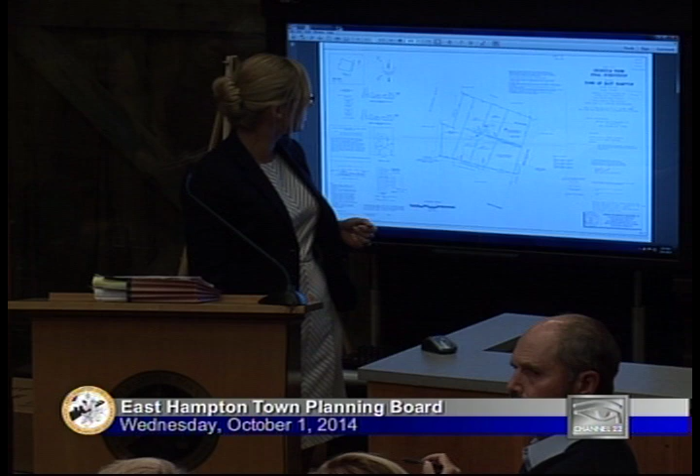I have a question. Where exactly is the tennis court to be? Is it going to be on the west side or the south side? The ag reserve. I know, but it could be north too, there's a difference because there is a neighbor to the south or the west.

I mean, this is the only boundary line that we're asking you to vary. No, I know, but the tennis court would have to comply, I'm just curious where it would be if we're going to okay a smaller setback. If it's in the southwest corner, is there a residential property on the other side? It would have to be 50 feet from that on 3 sides where it's bordering other residential lots. So it would have to meet this setback.

We're only asking that this setback be varied, the setback from the ag reserve. So it would be 10 feet and then 50 feet elsewhere. 10 and 50, exactly.

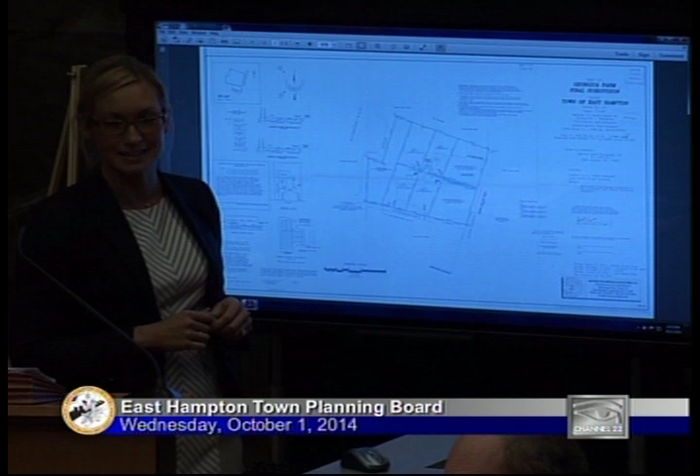Go ahead, follow up? Just- Yeah, Joe, right? But I'm not clear what the reason is why the applicant wants this.

Well, in order to design the property the way they would like, they would either have to have this granted by you, or they would have to go to the zoning board for a variance, which is a possibility, but they're not often granted those setbacks. Since it's very unlikely that an agricultural reserve would be bothered by the noise of a tennis court, the board has granted this type of relief in the past, so that is why we're asking for it.

All right, I'll comment. Thank you, Ms. Cooley. Is there anyone else that would like to comment on the memo? This is Bob Schaefer's application. He's not here this evening, so Nancy Keeshan is kind enough to take the lead on it.

Thanks, Reed. That was my main concern as to where exactly the tennis court is—it's hard to agree to something where I really don't know what I'm approving. I have no problem with the 10 feet if it's on the east side, because it's all within its own space, it's not going to irritate anybody. That would be fine, but I'd be reluctant to approve it if it were on the west side.

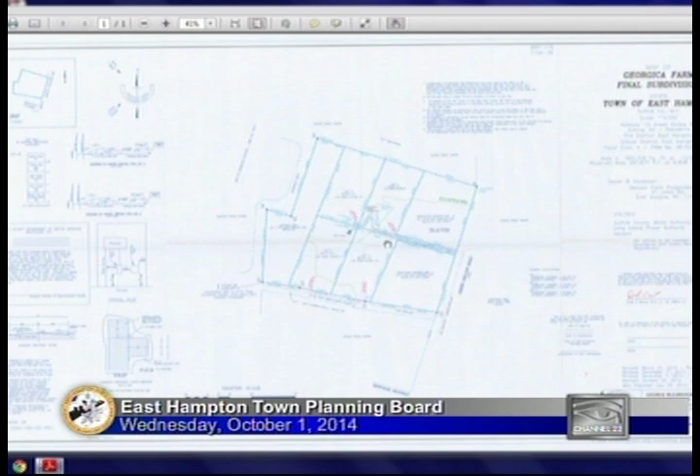Okay, and I think that's a good point, absolutely. I think a covenant would certainly satisfy me. Again, I think the 10 feet from someone using the ag reserve would be no big deal, but when these properties change hands, somebody might not realize that was a relaxation of a setback, and then could have a problem that something so close to them is bothering them, when really they got the benefit of that 20 feet.

Use some of the language in the code, like the right-to-farm part, about warning people about dust and chemicals and the normal things that go along with agriculture. Well, certainly if the applicant's willing to do that and our attorney can make it all kosher, I would be all for it. I think that's fair—we could do that, sure.

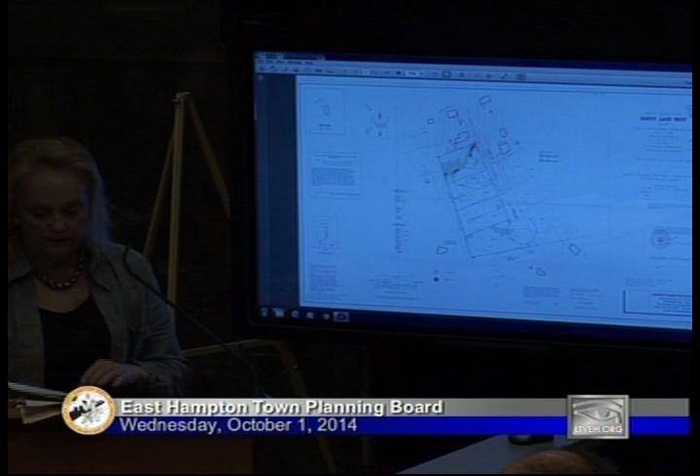The map was revised to provide 2-foot topographic contours, and it shows extensive areas of 15 to 20% slopes in green and 20% and greater in red on Lot 1. Lot 4 turned out not to have as significant topography.

The applicant's letter states that the areas of 20% slopes are not natural and are the result of earthwork done in the past, particularly with regard to the road that they cite, an old driveway that was put in. The planning department notes that at least one of these areas shown of 20% slopes connects to areas off the property and doesn't appear to necessarily represent regrading of the site.

There are a number of provisions of the town code that require that the planning board consider relatively flat terrain, both at home sites and along access drives, requiring a minimum of fill, and that significant topographic features shall not be destroyed.

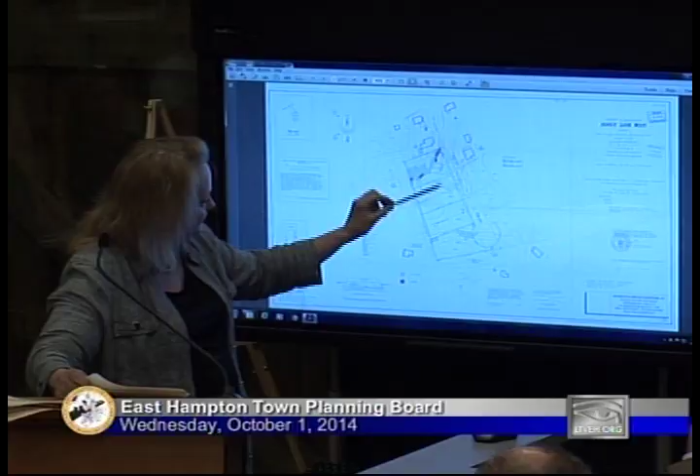So the planning department offers several potential mitigation factors for consideration. The first is, if you increase the lot width of Lot 1 and maybe adjust the lot lines a little bit, you might be able to pick up another 15 feet of flat area, which would give you a little bit more flat area on Lot 1 that could go within a building envelope that wouldn't need grading.

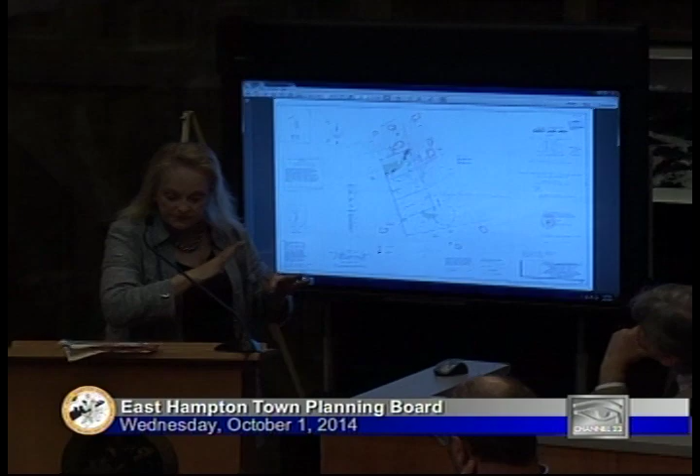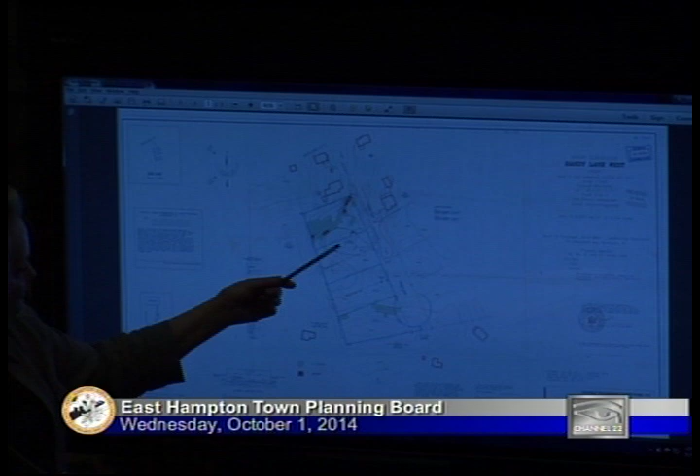Each of the lots exceeds the minimum lot area, so a slight reduction in lot area wouldn't appear to affect the ability to have lots that meet zoning. You could require a building envelope that excludes the rear portion of Lot 1, where the steepest topography is. You could limit clearing and grading to a designated building envelope, with no clearing or grading outside of that. Additionally, you could require installation of project limiting fencing and straw bales between Lot 1 and Lot 2, so that when there is clearing and grading, there's not a lot of erosion onto the adjoining lot.

Finally, we did receive a letter from the fire marshal stating that the project is next to a public water supply, and that's sufficient for firefighting purposes.

So in conclusion, discussion regarding the clearing calculations and the topographic contours, and whether there's any mitigation that should be incorporated in the project on Lot 1, are outstanding. Thank you, Ms. Pahwul.

Is there anyone here that would like to comment on this memo? I do have some questions for you, Mr. Weaver, in reference to the town engineer's memo. I'm sure you've seen this. I've discussed it with him, so I'll go to that. Okay, yeah, Dave Weaver, representing the applicant.

The only areas that the town code says should be excluded from the building envelopes are areas in excess of 20% slopes. These areas up here and this one down here were both created by construction of the house. The driveway that Joanne is referring to - I pointed it out, it was actually overlooked by me even my first time looking at the site because there is vegetation growing in it. It was cleared when the house was constructed, and it actually created these 20% slopes along that part. This little 20% slope here was where there was some cutting done to level out the lawn. The bottom line is all of the 20% slopes within the building envelopes were man-made, could be easily eliminated, and we feel should not be removed from the building envelopes.

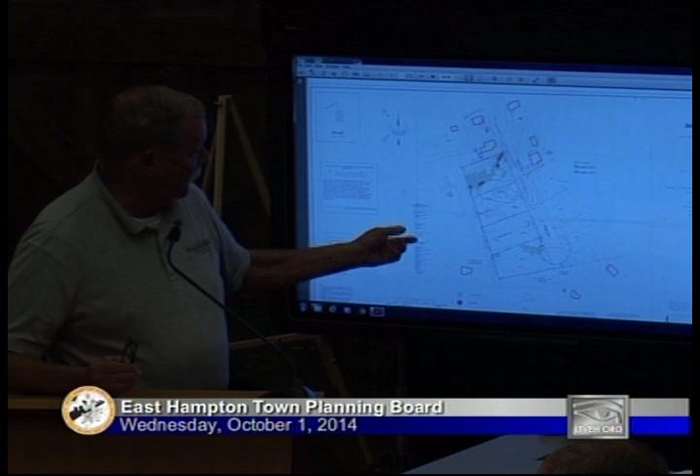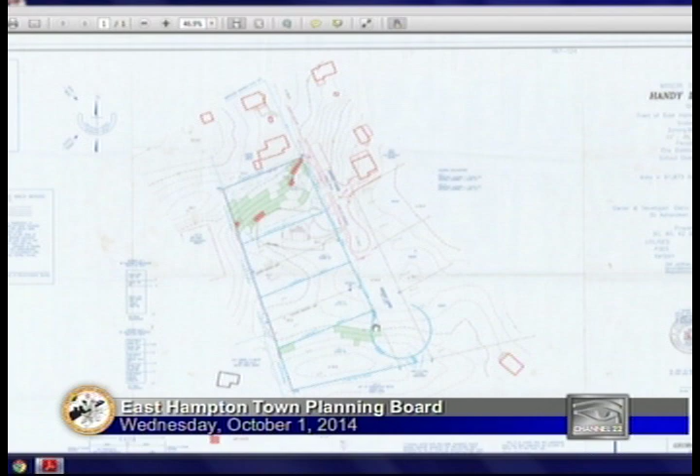As far as the driveway, the town engineer asked that the road be moved further up the hill, and we agree. The applicant owns the land on both sides of the street, so he has no problem with that, and we will move, in the next presentation to you, the cul-de-sac up into the flat area. He wants it all the way up here where the old cul-de-sac was. We disagree, and would rather have it down in the level area, but a little bit longer so we don't have to create flag lots. I told you before, I'm opposed to flag lots in half-acre subdivisions, and we still are - we'd rather not have any flag lots and have all of our lots have direct access onto the cul-de-sac.

Have any further questions? As far as silt bales between lots 1 and 2, that's a typical condition of yours, required in almost any subdivision we've done lately, so I would expect that to be a condition of approval anyway. Fencing and silt bales, we have no problem with that. It's basically been required in every subdivision we do lately - one of your standard boilerplate conditions of subdivision approval. So we're not opposed to that at all.

Thank you. Is there anything else? Okay, anyone else? Then I'll go right to Diana Weir. Hi, thank you, Dave. You cleared up some of the questions I was going to ask.

I also agree about the driveway and taking access on half-acre lots. Usually flag lots in a half-acre zone make long, narrow driveways, and the fire departments can't get in, so I agree this is a much better layout with the circle down at the end. And I have no problem with those 20-foot things that were created, because I understand how that happens. I haven't really gone to look at the property in person, but I have a pretty good view here.

So I'm comfortable with what's been presented so far. I don't think the lots have to be made smaller. But I would like to see the building envelopes on that so we can get an idea of where it's going to be for us, to see where the houses are going to be laid out. I understand there's public water, so you can be closer to lot number 2, that second lot, because you don't have to worry about the separation, but I would like to see the building envelopes for the planning board to be able to see clearly where they're going to be.

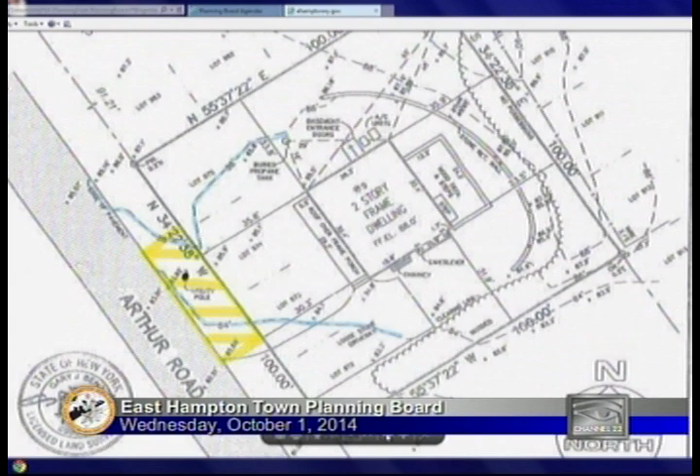Based on the topography that's submitted, this really is the area of the steepest slopes here. So it's actually not the northern 50 feet, it's about 25 feet in to about 65 feet in. So I do think that, provided counsel agrees, the board could have a legitimate reason to say that based on an actual topographic survey of the property, that rise is located more towards the center of the property.

I wouldn't recommend that you remove that condition outright, because I do think it's clearly demonstrated that rise still exists. The question is what is the proper location of that rise. So with that, I'll leave it to the board.

Oh man, I went to the site this afternoon, I didn't get it. Lori Wiltshire for Land Planning Services. My clients contacted me about this request because it came up in their title report when they purchased the property.

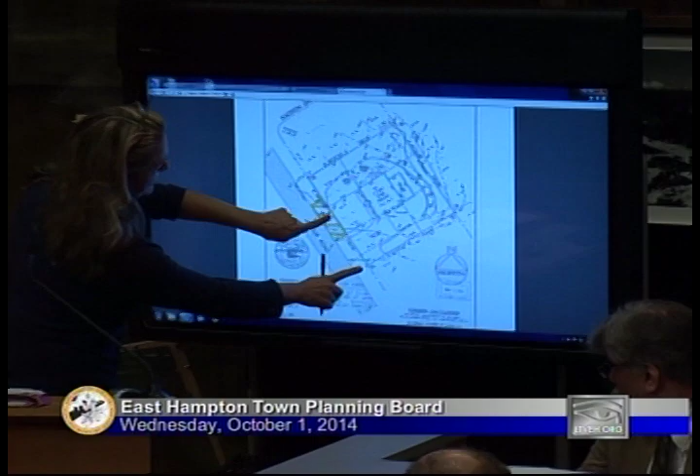It was a very strange thing to find in a title report, and it's actually a strange condition for a planning board to impose on a single-family residential neighborhood like this. It's in the covenants and restrictions. That's how it ended up in the title report, because it was a required condition of the planning board in 1986 that this 50 feet not have a driveway because of the supposed slopes, which are actually here, and that they would have to take access over here, which they have done.

However, my clients have two issues. One is that this bump created by road construction originally is causing runoff towards the house and flooding in the basement. Two, they'd like to move the front door over here and come in over here, so it was causing a problem from both angles. We were hoping to completely eliminate the condition of approval and modify the covenants and restrictions so they can basically use their residential property as most people use their residential property.

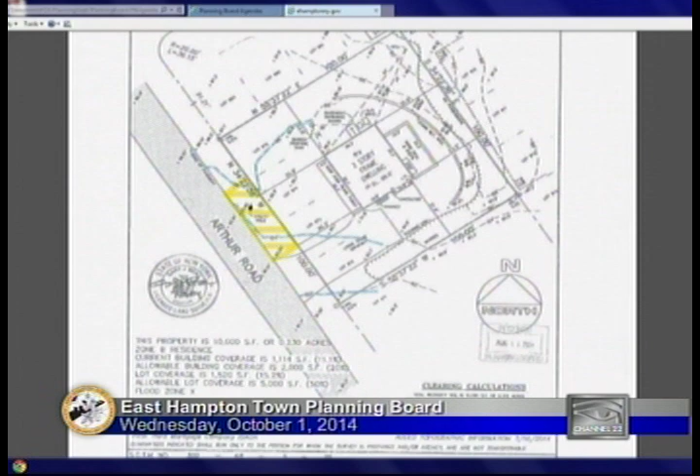Very strange condition, and the circumstances did change with the topography map, and there's no 20% slopes on this lot anywhere. So I would personally like to eliminate the condition and allow us to modify the covenants.

Thank you, Lori. Thank you. I have to say, it's very honest of your applicant to go through this process. Really, man, oh man, I would have gotten a bulldozer and flattened that out, and there you go. I mean, really, it's like...

So at this time, I'll go right to Nancy Keeshan. Thank you. Well, it's Hither Hills, but there's more hither there than hills. I walked by that 5,000 times as a kid, and I really don't know what they were basing their decision on, placing that odd covenant.

And I think there's definitely a change, because we have a new topographical map with good information. So I'd be willing to remove it and support what you want to do. Job Potter? Yeah, I'm fine with it. Pat Schutte? Yeah, I as well.

I went to the site and I just didn't understand this at all, and I was very confused. Yeah, very confused, me too. I needed to have this explained to me tonight, like what the heck. We've had driveways where there's a 15-foot cliff and you don't want to cut in there, and so I didn't get it.

So yes, if anyone's listening from the 1986 planning board, I'm sorry, but I'm comfortable with this change and revision. Me too, I would have bulldozed it down a long time ago. So I agree, no problem.

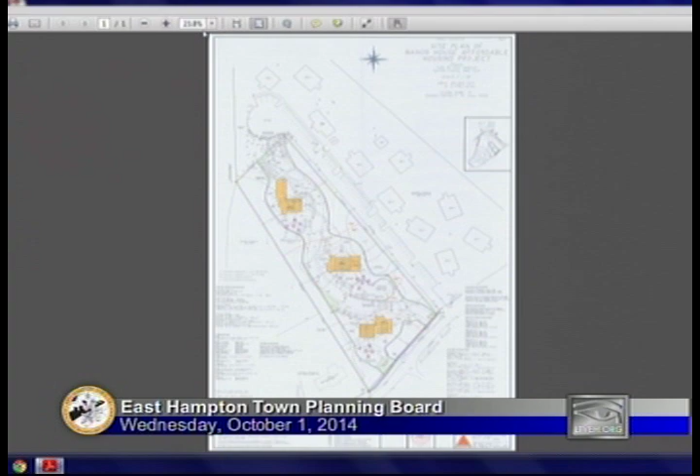Part 4D talks about screening and maintaining open space. We note that although they've illustrated areas of revegetation along the corners, there's some up here, and this rough dotted line is the clearing line where they'll leave everything in its natural state. So they've buffered it along the sides, but there's nothing given for landscaping in the immediate area of the units themselves.

The applicants also, with the narrative submitted after this memo, did submit information about plants and bushes they propose to plant around those units. Ultimately, we would like to see a sketch that shows where those are going to be, but the plants themselves are acceptable.

So they are proposing to use the town's affordable housing credit program. They'll need 4 credits. They recently went in front of the town board for a public hearing to request those credits. You had actually reviewed this 7 years ago or so—obviously not every one of the individual members here—but it was in front of the planning board, and the planning board voted to support the project and sent a recommendation letter to the town board. So those credits are pending.

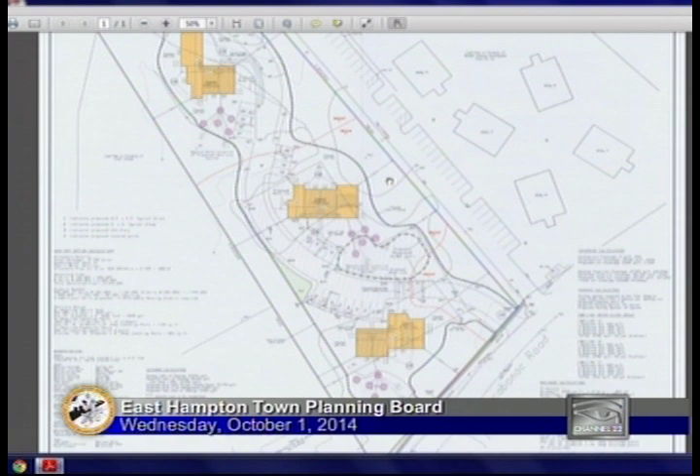With regard to traffic, this is a 12-unit site. On almost every other affordable housing complex you've reviewed, you've required a traffic study. However, most of them are of a larger scale—St. Michael's was 40 units. This is 12 units throughout these buildings here, so I don't know that the scale warrants that. However, that is a discussion you can have as to whether or not you feel that's needed.

There are no comments yet from the Office of Fire Prevention. I know that the chief fire marshal and a member of the East Hampton Fire Department discussed this yesterday, I believe. However, you have yet, as of today, to receive written comments about it.

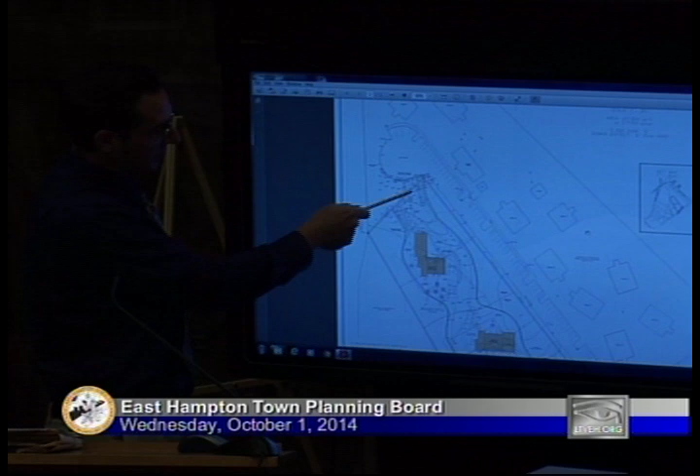One thing that bears pointing out is the fact that the applicants are proposing access for emergency vehicles through Windmill 1 by the cul-de-sac on that property, and there's a gate here that will open for emergency vehicles. So that, I think, is going to be a point of interest for the fire marshal and the fire department. But again, they haven't given you any specific comments on that.

And that's the only access point that's gated, correct? That's the only gated one, yeah. The other access point is at Accabonac Road.

The applicants have applied to the ARB. They submitted a comprehensive site lighting plan, which we find okay. In particular, they're commended for adding photo sensor overrides to the lights in front of the individual units so that the individual units can't leave their lights on all day.

As I said, with landscaping, we need more info. We're not recommending an archaeological report because it's not in the circle and squares map given out by the state.

The town engineer—I actually don't know if he had comments, because I don't have them attached to my memo. I don't know if you received those. Okay, so I guess comments from him are pending.

So in conclusion, it appears that the application is incomplete. Basically, you should focus on three things: whether or not more information is needed in a narrative, whether or not a traffic study should be required, and if additional information regarding the landscaping needs to be submitted.

I would add that I had anticipated the chief fire marshal would have comments for you for this meeting. It should get fire review before it is deemed complete. So I would say those are the four issues that need to be resolved before this could be deemed complete.

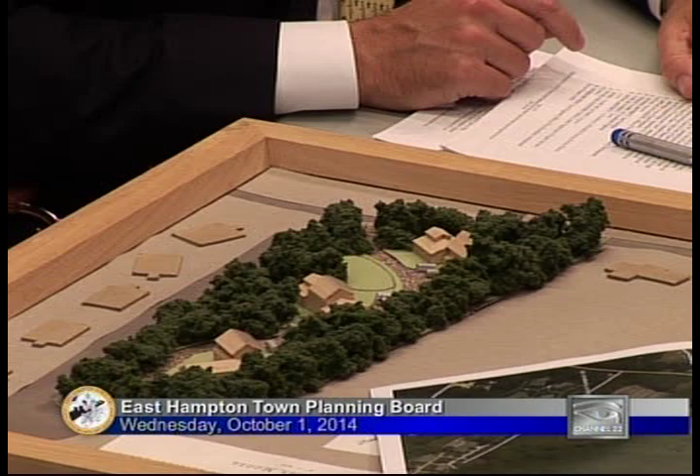Wow, that's so cool. We could almost put that on the table here. Move your stuff, right here. Do one here, and then we'll look at them for a couple minutes and swap. This is very Accabonac, right, cool. The access gate here. My stuff, wow, look at this one. Another one, boy. Move my stuff. Right here, come on, come on. Bring it up, that's close, good. Up close and personal, it's beautiful. Here we go.

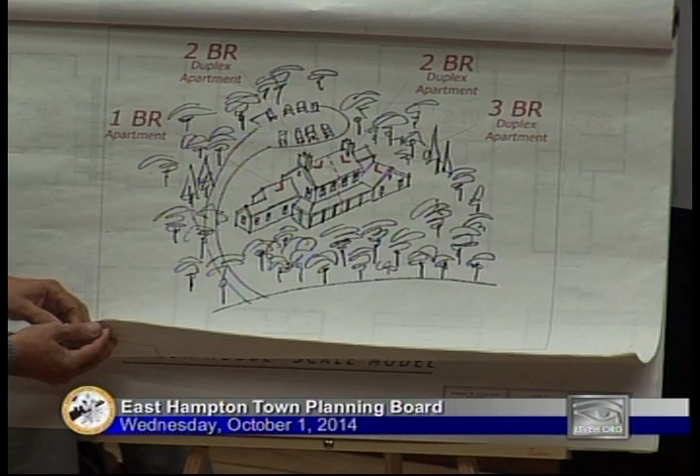Then we started to look at what would be the best floor plans to have. We worked together as a committee and developed these floor plans here that are very typical. So we have a two-bedroom duplex, a three-bedroom that could be either one-story or two-story, and a small one-bedroom.

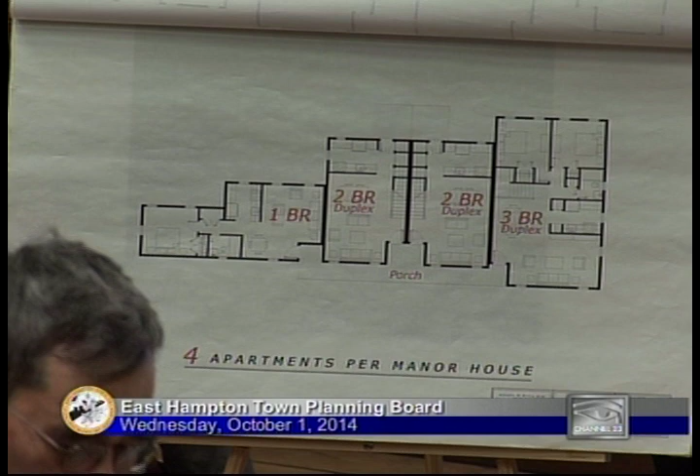Then we decided that in a typical building, we could put these together, just like that. And that's what that model there represents. So these are two-bedroom, two-story units, this is a three-bedroom unit, this is a one-bedroom unit. But they can be assembled in many different combinations.

What we started to do is reverse them, and then put them into combinations, and we came up with 40 different combinations. As you can see, the configuration will fit practically any lot that would be available. These are some of the typical units. Here we just picked six of them, and how they could look as farmhouses. Again, that model is pretty representative of what we had in mind.

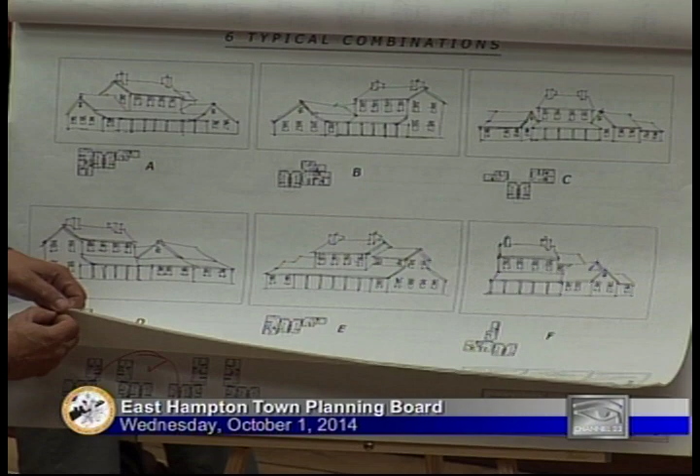And then, the elevations here, when this lot became available, the tennis courts, we took a look at it, and we decided that this one and that one would fit and be appropriate for this lot. And so here they are, 1, 2, 3.

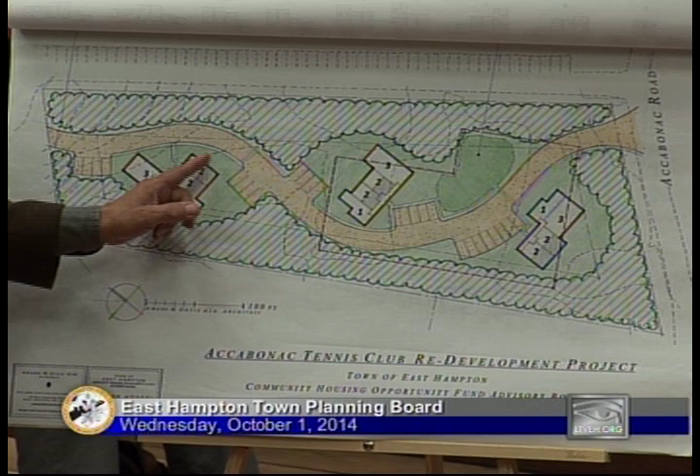We decided to orient them so that this facade, the roof, is facing due south, so they can get solar panels. We decided that the road would sort of meander through the lot. There's a playground over here. There's also access for fire equipment. If we come through here, through the gate, come around here, so it would be able to turn and serve the complex. This is an overhead view.

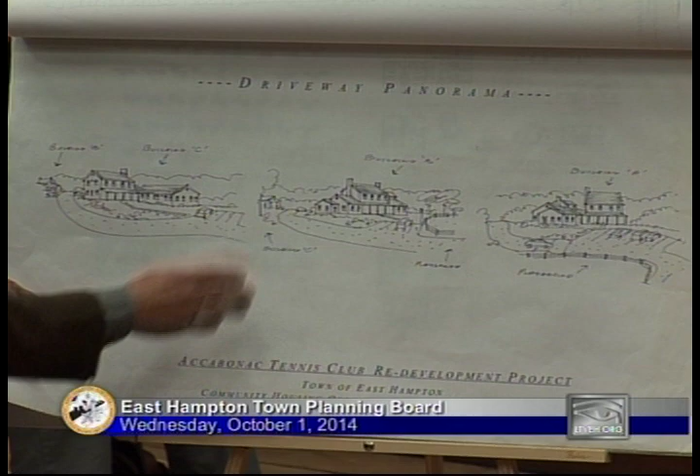And this is a panorama, kind of a combined panorama of what the building would look like as we drive through. As you can see, they would all appear as farmhouse buildings. If you take the model and just sort of look at it from this perspective, that's pretty much what you'll see as you approach the road.

Each one's different, right? Nice. And the Velcro represents solar panels. These are the individual buildings that were selected, and this is what we have now.

Can I ask a question real quick, sir? There was one concern I had. I think this is great, by the way, but one concern I did have was in reference to emergency service vehicles, and it sounds like you're fine with that because they can filter through and around through the back. A question I would have is, why do you even need a gate in that rear part? That doesn't make much sense to me. Again, it's not just emergency service vehicles, but you have service delivery trucks and things of that nature that might not be able to get through that gated area, correct? I mean, maybe I'm curious about why that would be gated off.

Well, I think, my name is Tom Ruhle, by the way, Director of Housing for the town of East Hampton. And interestingly enough, as Marguerite asked me before, I was on the '86 Planning Board, but I don't remember the application either. Starting to feel old. No, but anyway, it's a good question. We were trying to avoid creating it as a continuous through loop that would develop everyday use, yeah.

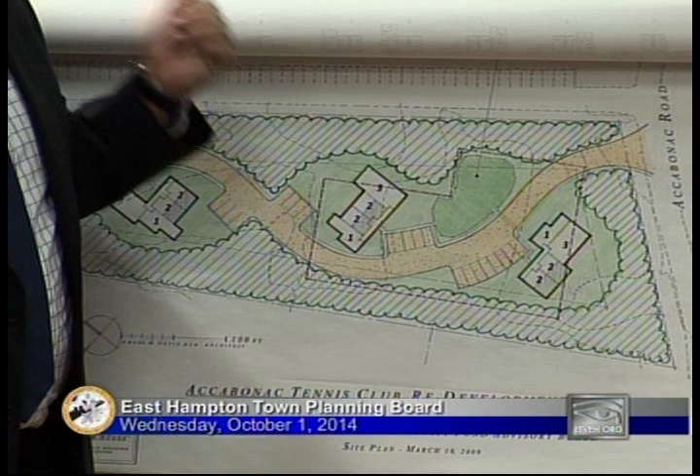Well, I would imagine, but Dave has pointed out, I know he hasn't spoken yet, but I spoke to him and he raises a valid point. My feeling was one of these would be open, you would pull in, back out, and go out. But there is something to be said for making it a through, so that we don't.

Well, I think that creates issues for Windmill. They're not gonna want to have traffic from here coming. No, I'm just wondering, at the end, if not a cul-de-sac, some kind of a T or a Y, some way that a sizable truck can turn around without going through the gate and get back out.

Well, this is kind of one of those situations where typically we will talk to Tom Talmage about coming up with some solution along those lines. Our engineering work was done by the town engineer, so it's kind of like, yes, I think that's something we're gonna revisit. I think the board has a valid point about trying to create some way of being able to make deliveries on the site and leave.

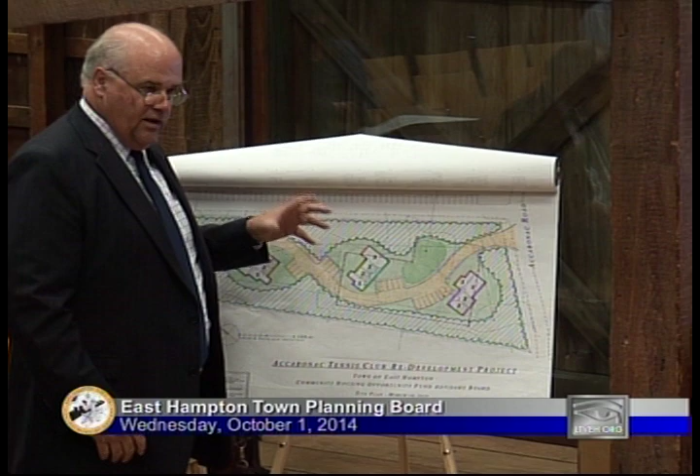Just to give a little bit of background - most people go out of their way to keep me talking less. This originally, the concept, the town has done rental housing and the town has done home ownership. This is a hybrid, the ability to take someone who may not be able to afford a house, but has a little bit more income than a renter, and buy a condo unit. So it's the first time we've proposed this.

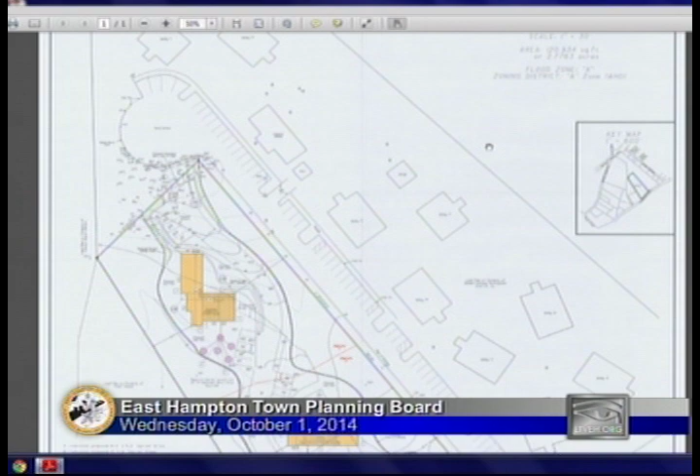Just to explain, we're hoping - as John and I found out, because we both went to Albany to try to convince the state of New York to change the law - the condo units the buyers will have to own the land underneath it. We were originally proposing it on leased land, which apparently is illegal in New York State. If you have a land trust, you could have done it. Yeah, there's four places it's been done. I got the New York State Senate to pass a change to state law, but there's one on Shelter Island. You could have done a land trust, but that would be another animal.

As I've had it explained to me, you cannot do condominiums on residential leased land. You can do commercial condominiums. It would be a land trust - the land trust allows you to do that, but you would own the fee title of all of it, and they would just own the structure. Well, that's the model we've used at Green Hollow, and that's what we're planning on doing here, until the condominium attorney said you can't.

Well, it can't, because it can't be a condo, since the state condo law doesn't allow it - it would have to be a land trust to do that. But Battery Park City technically is a condo that's been allowed. So I said if they did it for them, they should do it for us, and we almost got that. But anyway, our plan is to own, with a 99-year lease with the homeowners association, everything but the sale of the actual unit with the underlying land, and to protect the property with recapture provisions and provisions so that they stay affordable, for want of a better term, in perpetuity.

Can I ask some questions while we're on this?

Sure, so your structure would be a condominium structure, and you'd have some kind of homeowner association? Correct, with an offering plan? Yes. Just so you know, 12 units is tough for common charges. Depending on what you have, you don't have amenities, so it's not going to be like a pool, but you still are going to have insurance and maintenance of the property.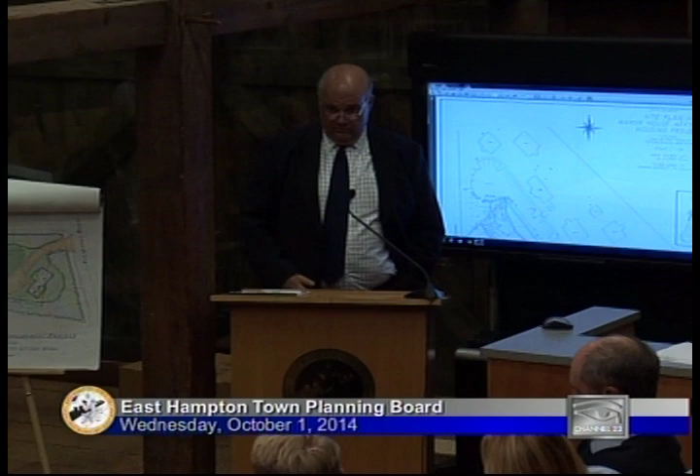Because the housing authority has experience with plowing and mowing. But the offering plan is going to have to be filed, right? Yes, with the Attorney General's office. That's how I found out you can't build condos, was one of the things the attorney that the town will be hiring told me as this gets further through the process. You can't do that. So that's how we evolved into what we're doing. It's an evolutionary process, you learn on the fly.

But that's good, this is a wonderful concept, and I love, ever since you came up with this architectural design, it's been wonderful. For the record, Amato has donated his time, and he is amazing. Donated this design, and the town actually owns the design.

It's been donated, and I have to thank the planning department too, because Joanne Powell originally, who I think may have left, Eric now, Marguerite, of course, being in charge of all of those, the town engineer, and we even got our plant list from the planning department. Because when I found out we didn't have base plantings around here, we went over to planning and said, okay, what would you like us to plant? So it's sort of one of those, a lot of people working together and hopefully going to make it happen.

I know Dave has some other comments, and I know what some of them are, and some of them are pretty good ideas, but I won't speak for Dave. Anyway, does anybody have any other questions?

But you do have a narrative that's going to go into the file. I'm not talking about the narrative before, I put a narrative into the file. I didn't see it yet. Me being me, after Eric wrote the memo, I said, what do you think's missing? And he told me, and so I wrote a response.

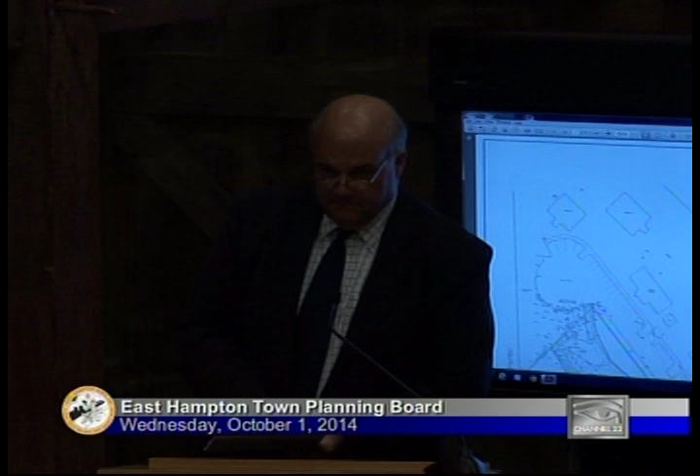Mr. Weaver? Yeah, please. Dave Weaver, first I'm representing East Hampton Ambulance. The fire marshal and fire department were nice enough to call me to their meeting yesterday to see how we felt about this project. The ambulance corps totally supports affordable housing, and we'd hope to get a few members out of this complex. So we totally support affordable housing.

The gate concept, we're not in favor of at all, unless you put in a full-size cul-de-sac. That would be our first choice. Because we're going to get in there with an ambulance, and at 3 o'clock in the morning, we don't want to have to jump out and fumble with the key, have the gate not open, any of that. And then, if all the parking spaces are taken, with someone's life in danger, have to back all the way out of there, and some of our drivers won't make it. I hope I will, I'm the driving instructor. But anyway, so the fence itself, as the project is designed, is totally unacceptable. We know we don't get a vote, but hopefully you'll listen to us.

A cul-de-sac would be acceptable, a full-size cul-de-sac, so we can make it without having to turn around. That would be preferred. If that doesn't fit, an emergency vehicle turnaround would also be accepted. But our first choice would be the elimination of the gate.

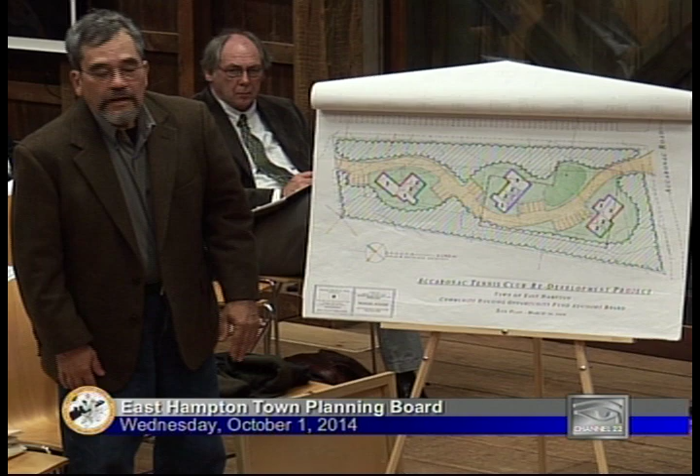Well, there is a small porch in front of each unit. To the back? No, at the front. Right. We actually had considered patios at the beginning. I'm not quite sure how that. It was in the narrative, it never got put back on the actual site plan.

Well, it would be a good consideration, because they might have barbecue or something in their own little space, and sometimes they have fences in between, so you have a little slab, and then you have a little privacy area, so you can do some outside stuff as a family. I've seen it in other complexes. I think it's a consideration for the applicant to think about. Yeah, it's a good suggestion.

Okay, how are you, Ian? Yeah, this is the first time I've seen the project. I understand it's been around for a while. I appreciate the collaborative spirit of everybody involved, including Mr. Weaver and the applicants and Tom.

As far as the cul-de-sac goes, I agree there needs to be some turnaround, not only for emergency vehicles, but for daily deliveries and things like that. I hate redundancy, so if there were a way, I realize you'd have to work it out with Windmill Village, if there were a way to have an unlocked gate where you could share that cul-de-sac, I think that's ideal. However, there may be hurdles involved. If that's not possible, I don't think it's necessary to have a full cul-de-sac there, but a large turnaround and still have that emergency gate that could be used in case of some sort of emergency. But again, if there were a way to leave that gate open and just share that cul-de-sac, I think that's ideal. I hate to create more pavement unnecessarily.

I think it's a generally good project. I know that Diana and Tom certainly know a lot more about affordable housing than I do, and the types of things that are good. So the patio in the back sounds great to me. But again, I think this is the first time I've seen it. You'll discuss it and probably improve upon the plan.

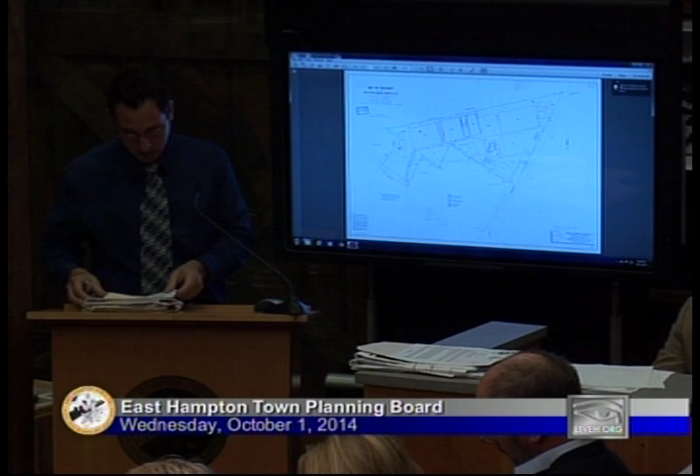Our next site plan review is going to be Hampton Racquet at Green Hollow. This was postponed from a previous meeting. The applicants submitted a narrative, and based on the wording, it sounds like they also run a tennis club and a day camp. For the day camp, we've traditionally had applicants get a semi-public facility special permit for that type of use, so the applicant should submit that, the required fees, and it should be part of this application.

There's an item on here illustrated as a garage, and I went to the site. It appeared that it wasn't being used as a garage, but as some kind of store. The applicants can address that and clarify the use of that building.

Right now the site plan is spread across two documents - they submitted a revegetation plan, and they also have a survey from before, but we don't have one formal site plan based on a survey that illustrates every proposed and existing structure, differentiated, and includes coverage calculations and all the required elements.

So I'll go back to the re-veg plan, since it has more detail. 60-foot setbacks, doubled, are going to be required along most of the property lines here since it borders a residential district. However, the board can relax that doubled setback requirement when it borders non-residential property.

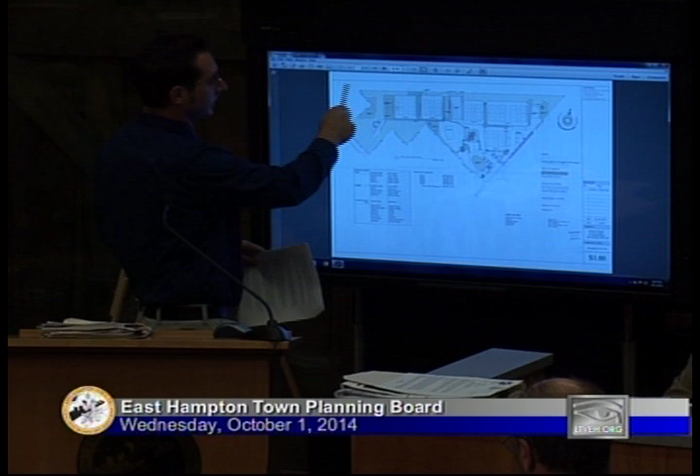For parking, they've illustrated 52 parking spaces throughout the site, which is what's required from the previous site plan approval. They've illustrated 25 of them as grass parking. The planning board can allow up to 50% of parking as grass parking if appropriate based on seasonality - it does seem the day camp use is probably more of a summertime use, and the tennis club, being outdoors, would also be more seasonal.

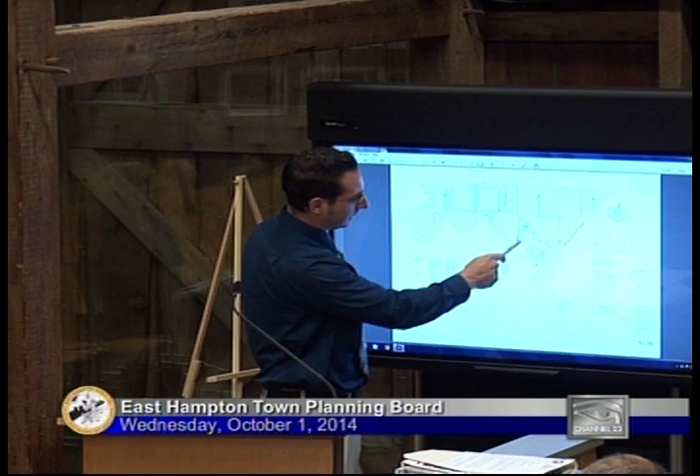So basically, they're proposing a gravel parking lot in the southern area, with an overflow grass parking area to the north. There's also a second access point and 8 parking spaces proposed along this side of the property, coming off of Buckskill Road, and you'll need to determine whether or not that's appropriate.

The applicants can speak to why they feel they need that second access point. It was stated at an earlier meeting that they want emergency services access. This will, at the very least, need to be redesigned a little, since the parking spaces need to meet the 60-foot setback from each of these two property lines. But it does look like they could fit a second access coming in off Buckskill Road.

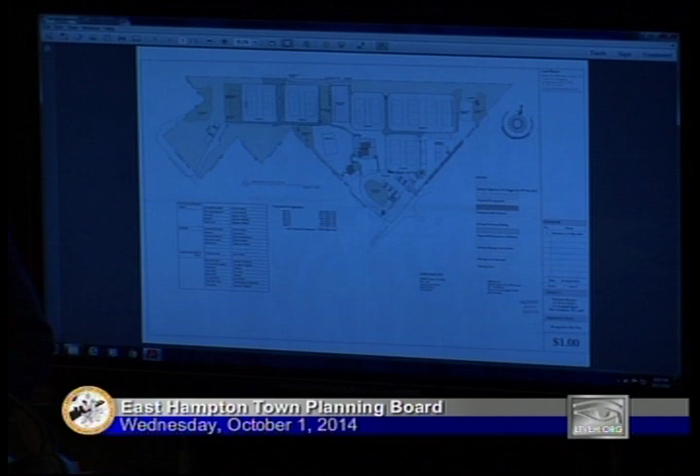They're proposing to remove this tennis court in this area. They could put a parking area either up here or situated a little differently - they could dimensionally fit it within the regulations, but you should discuss with them whether or not that second area is appropriate.

They had added a 13th tennis court, which they couldn't fit on site because of the regulations. This was one right here. They're now proposing to keep that one but remove this westernmost one, which is near a residence. That's acceptable, bringing them down to 12, which is what they're approved for. This one they've converted to a practice court.

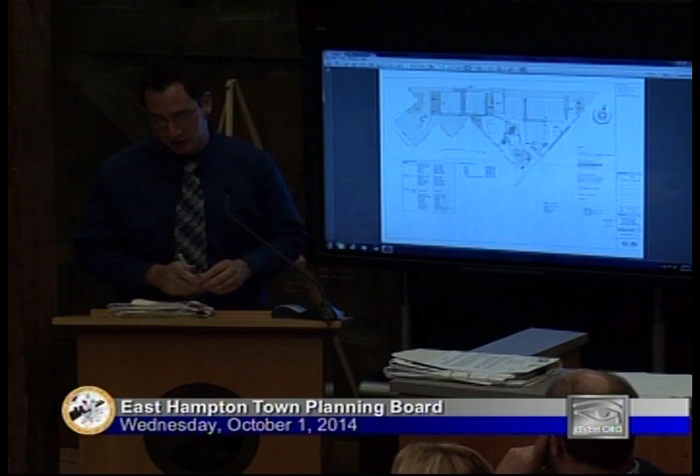You could look at it as though that's not a full tennis court, and that would affect their parking requirement. I don't know, I could see the other side too. If it's a practice court, people would still be using it, and it affects the use of the site. So that's something you might want to contact the chief building inspector about, to determine whether or not that's technically a tennis court, because the parking requirement is based off the number of tennis courts.

So that's one issue. As for the applicant's revegetation plan, myself and Lisa DeAndrea from the planning department met with the applicants and determined what the pre-existing amount of clearing was. The revegetation plan seems to meet the requirements. We find it acceptable.

There's no info on lighting submitted. We had previously recommended, and still do, that a comprehensive site lighting plan be submitted. The property's in the middle of a residential neighborhood. I don't know that they have too many structures here, but if they're going to be lighting the playing courts, that's of course a concern given the close proximity to residential property.

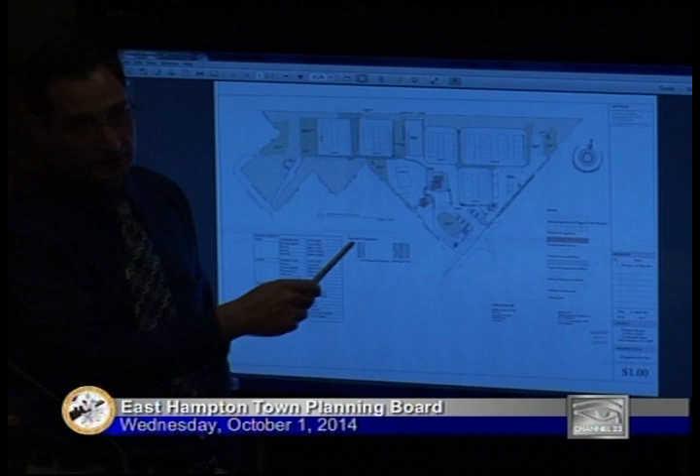With regard to landscaping, no information about landscaping has been submitted. You do have a re-veg plan here. I would think it would be prudent, there's not a whole lot of room here where this parking lot is. You can see this berm and line of trees illustrated on the plan, but it's actually on the neighbor's property. I do think that if there's anything the applicants could fit along that line, landscaping should be added in that area of the site.

Additionally, there's a big area up here where it looks like more screening could be provided. There's a lot going on with this property, and it's right in the middle of a residential neighborhood, so it's prudent to require as much screening and landscaping as possible.

The ARB has no comments. The town engineer has a memo. I won't go through everything individually, but the applicant should address his comments. He has five issues and says he does not find the engineering element satisfactory. With that, it seems the application is incomplete.

Thank you, Mr. Schantz. Let me ask Eric a question. Yeah, please, go ahead. Eric, I'm a little confused, but I guess that would be the western end of the property — they're looking to put a second access in there and parking, clear more?

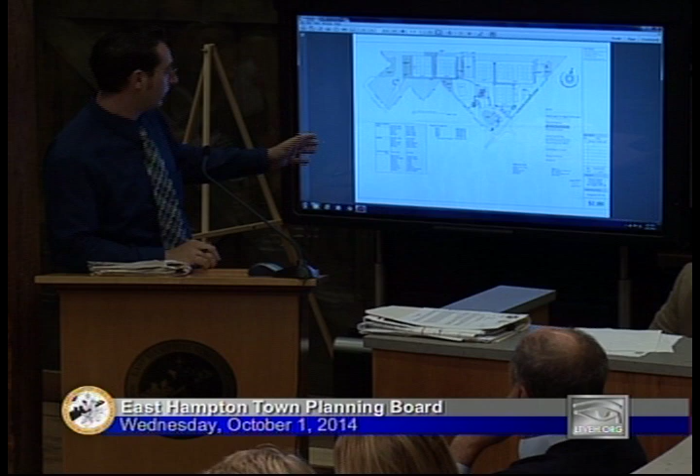Yes. Right now there's like a path that they cleared to there, but this new revegetation plan that they've submitted shows that area and then relocates some parking over in that area. So that's what they're proposing to you right now. Okay, and do we have that? I mean, what are they, just that? This is the only new plan that you have.

Okay, thank you. Is there someone here this evening who'd like to comment on this memo?

Members of the Planning Board, Tiffany Scarlato, 45 Division Street, Sag Harbor, for the applicant. I guess we'll start by addressing the elephant in the room tonight, which is the use issue. We do intend to amend the application for a semi-public use for children's programs, seasonal children's programs, as an accessory use to the tennis club. I would point the board to a May 1998 Zoning Board of Appeals decision, which verifies that this is in fact a legal accessory use for that property.

By way of background, the tennis club is a community-based club whose mission is to provide access for a tennis experience for all, covering both the activities of days gone by and the activities a modern 21st century club must provide. I'd point you again to the 1998 decision — we'll make a written submission to the board including all of this — which also notes that due to the seasonal nature of tennis clubs, and for economic reasons, it's important that area tennis clubs operate children's programs on a seasonal basis. As you know, clubs have had to change over the years and now offer a lot more than just tennis, and that's part of what this applicant has done and wants to see move forward.

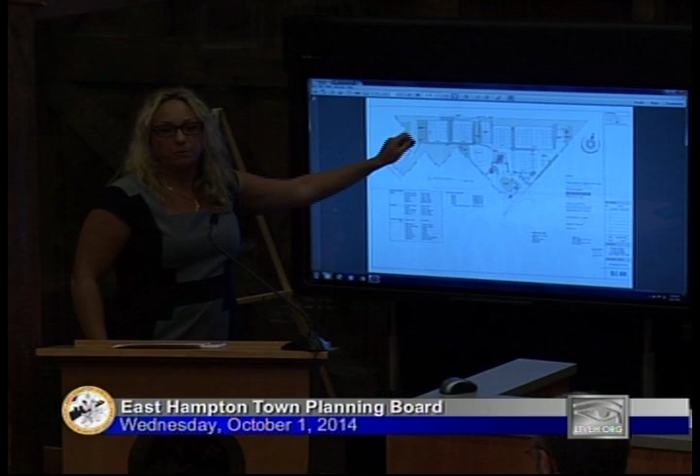In reference to the access point that the neighbors are not happy with, is there a reason it stops right there? Could you somehow extend that out? I'd assume you want that for emergency services vehicles. That was the issue—there was an incident on one of the tennis courts in the back, and they had to try to get emergency access. It's pretty difficult to get an ambulance through this location. So the issue really became having emergency access. I'm not sure I understand the question though.

Well, that parking lot's not in conformance where it is, right? It doesn't meet the setbacks. I think we do have an alternative plan. Britton was going to address a lot of the site plan issues, but we have an alternative plan that does meet the 60-foot setbacks.

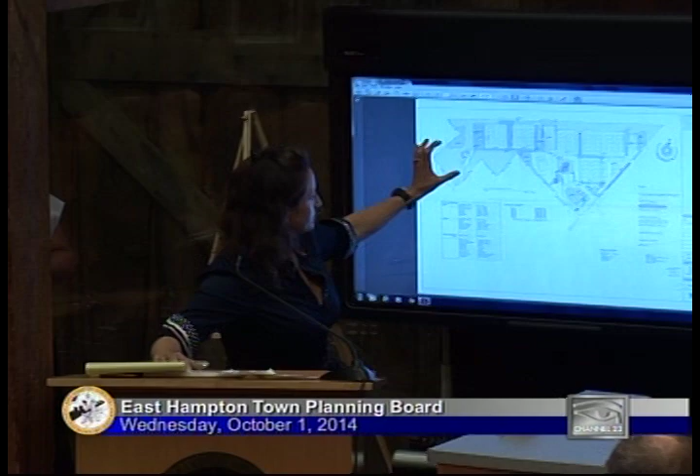Hi, Britton Bistrian, also for the applicant, Hampton Racquet. To address that specific issue, Eric brought up that this parking area needs a 60-foot setback from the two residential property lines. So it's literally a minor shifting—not an issue to meet it. I have a schematic of it, and it's like a 10-degree shift in exactly this same configuration.

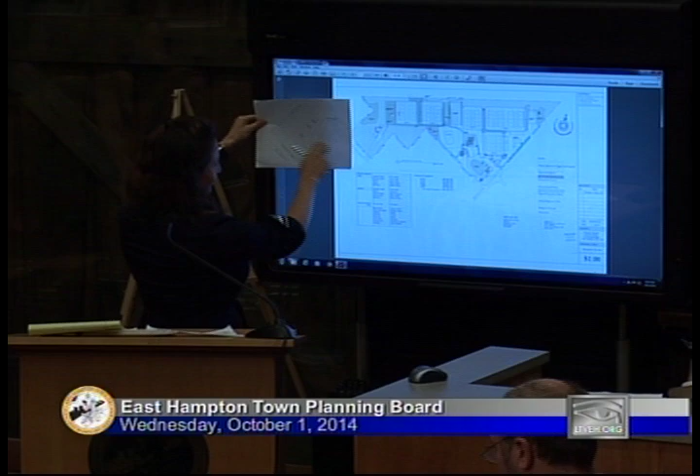Can you show that again, what your proposal is? Sure, it's basically exactly the same, except I put the red setback lines on. It was just clipping this last parking spot, so it sort of just rotated a little bit. Those are the parking areas on there, on the big plan. Yes, this is Buckskill Road here.

The purpose of this is that the parking for the club and tennis courts really is something people come to, play for an hour, and leave. This would be more along the lines of someone coming to work for the day—they park here and don't go back to their car until the end of the day. It's a one-time-use park, and it just made sense site-wise to distinguish the two.

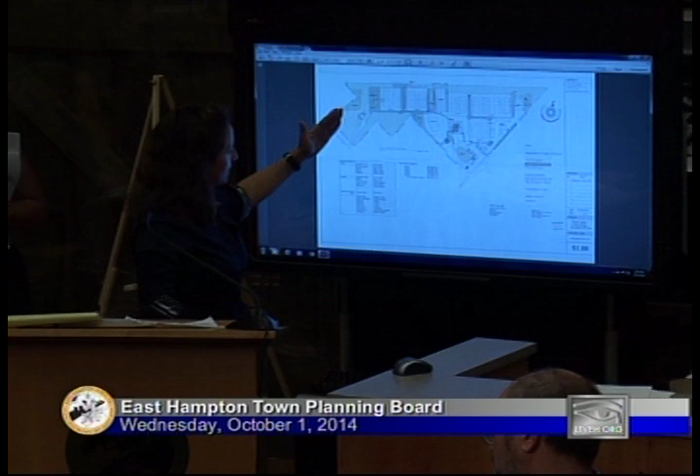This has always been a pretty wide footpath, it says 6-foot, but it was more of a wider path than that. If you look through the aerials going back as far as I looked, 1962 on GIS, it's always been there. It got widened and they started to use it as access because of a medical event that happened on this court. You can't physically get any further—you can't drive any vehicles from here.

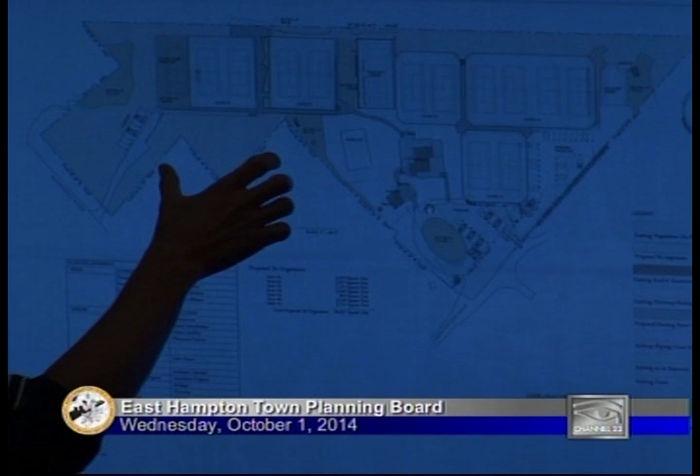It's a pretty long stretch, about 800 feet. There's no access to those areas, so it just seemed like a logical, low-impact way to have another egress from this site and also have employee parking over here.

Britton, maybe I'm still a little unclear—why don't you just extend that out? You're going to be removing that tennis court right up in that corner, correct? Oh, you mean extend it up to here? Yeah, I don't understand why you wouldn't, unless—sure, I mean, move the parking where the court is? That would be sensible, almost using the improved surface. Yeah, that's not a bad idea.

Another thing to consider while we're discussing this is an emergency turnaround. It doesn't seem like it's dimensioned for a turnaround. If you could have a turnaround in the front part of that back court, and have the parking continue behind that, so it's away from the residents. Yeah, we'll absolutely integrate that into the next plan.

Well, before you say that, I don't know about that, but go ahead. I'm sorry to ask questions, but I'm really confused by this application. You're going to revegetate an awful lot, more than half an acre. Where is that revegetation going? I thought it was going over here—that's why I'm shocked about this, shocked about this parking area.

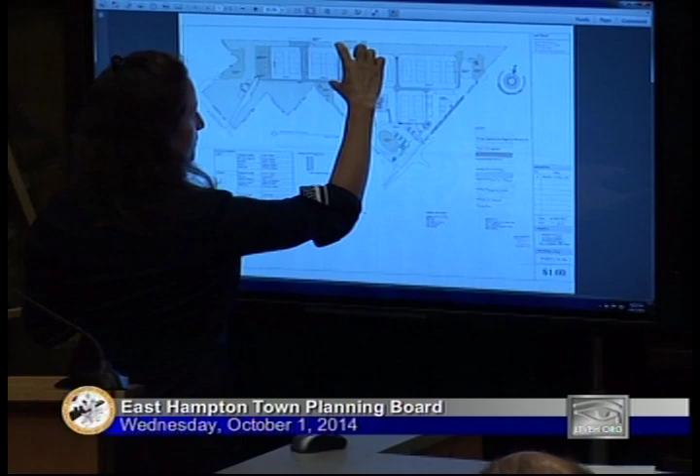The only way we could accomplish the revegetation was by finding large pockets. So we have 4,000 square feet here, 4,000 square feet here, a couple thousand square feet here, 4,000 here—it's all in pockets. And then this court, and this is actually the neighbor's mowed lawn, and that's about 6,000 square feet right there that will be revegetated.

It's not the neighbor's lawn, it's on this property. It's been functioning as a mowed lawn for the neighbor for many years - an encroaching issue, so they've encroached on that. But there's now a fence, and now the lawn looks strange in the middle of the woods.

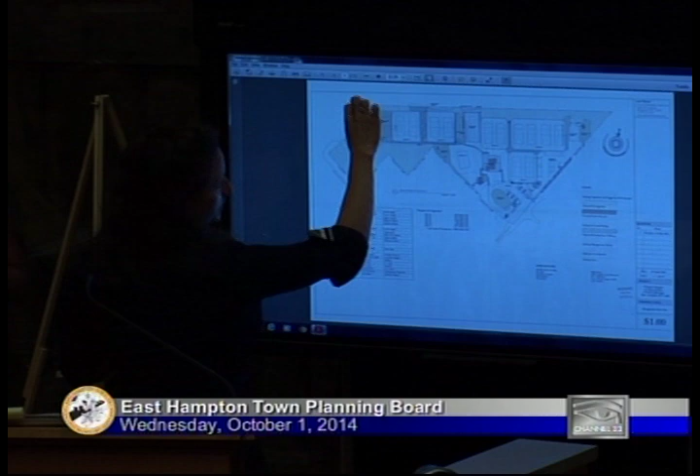Where was the relief for the setback to the railroad track? Because of this strange property configuration, if you start to drive 60-foot setbacks on all these jagged edges, we were asking for relief. This is the Long Island Railroad along this property line. We were asking for relief from this property line not to have to meet a 60-foot setback. Just to give you some scale, this court is 17 feet off that property line, so to meet 60 with the little sheds that service the courts is incongruent with the way the site was designed. So we were asking the planning board to relax that 60-foot setback from the Long Island Railroad, solely that property line, which you have the power to do.

There was also precedence at Hampton Country Day, who also operates a tennis camp on the Long Island Railroad off the same street. The planning board relaxed the setback for them - another railroad situation where you have a neighbor that is not going to be anybody. So that's another example of why we would want that to be the only side we can relax it.

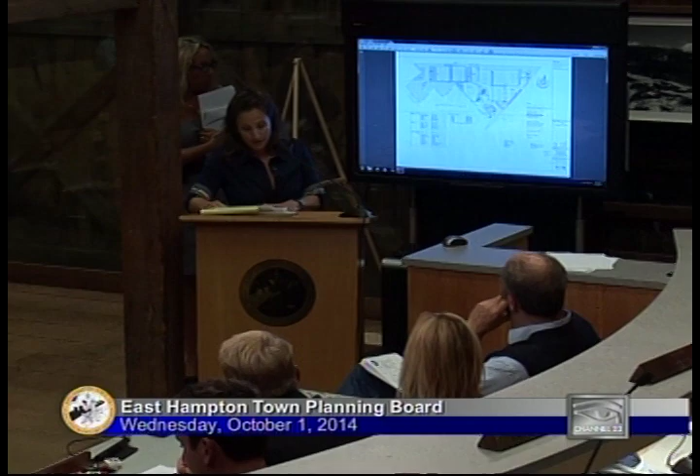And then we'll address Tom's list - we've addressed all those items. The reason we didn't struggle with it is I found I could show more in terms of proposed revegetation and proposed layout on this instead of going to Walbridge and waiting a couple months, since everyone's really busy to revise a site plan survey over and over again. I thought we would hammer down the issues on this, then submit one final proposed survey from Walbridge along with this, and convert it to a revegetation plan, landscaping plan. We're happy with any landscaping, and the board would like screening. The owner is a major participator in Long Island Native Plant Initiative, so landscaping is something we absolutely welcome.

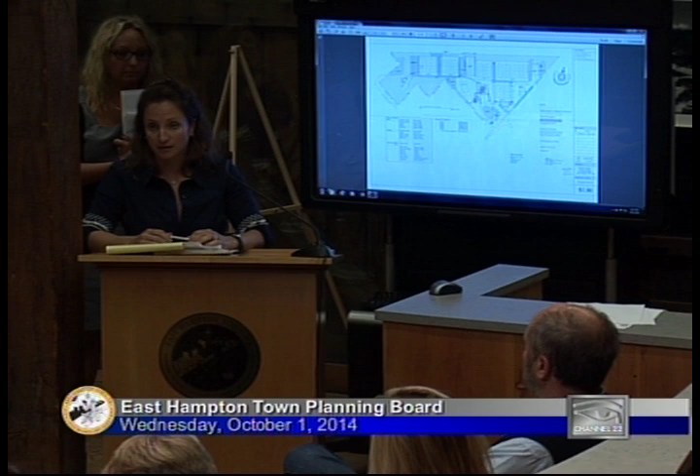In terms of lighting, I sort of struggle with that. I didn't add it to this because the club is dark and closed. There's not a single light on this entire site, and to start throwing lights up - I feel like it's worked for 25 years with no lights. Literally there's 4 lights on the building at the 4 egress doors. I don't really feel the need for adding more lighting. There's nothing that goes on at night - it gets dark and the place is empty. So to have to light our parking lots or light the site for a use that doesn't exist, I think that's incongruent with the way we use the property. But I'm happy to give you all the 4 lighting fixtures at the doors - they're all dark sky compliant, and they meet New York State Building Code for foot candles at an egress door. I'm happy to submit that to the board's files, but I was not planning on addressing a lighting plan further than that.

I talked to Tom Talmage about his memo. I was a little confused about one of the items, and he did clarify there was a 20-foot width - so he's asking for 20-foot here and 20-foot here where we had 18 and change. I'm happy to address that. Happy to address the handicap parking spaces - he was saying there's a handicap parking space, but we need to provide handicapped access to one of the courts. We'll put in an impermeable surface that would meet ADA code.

In terms of the semi-public facility use, we looked at a lot of other tennis clubs in East Hampton - Indoor Tennis, Ross, Amagansett East Side, Hampton Country Day - and the best parallel was Amagansett East Side. The way the parking calculations were figured was based on the courts, which is what we have, the 52, and then the semi-public facility use was based on the number of employees for the camp use. So in our next rendition, we'll give a calculation and justify the number of spots that we have.

I think that's all I have to address on the site plan issues, but I'm happy to answer questions. Thank you, Tiffany.

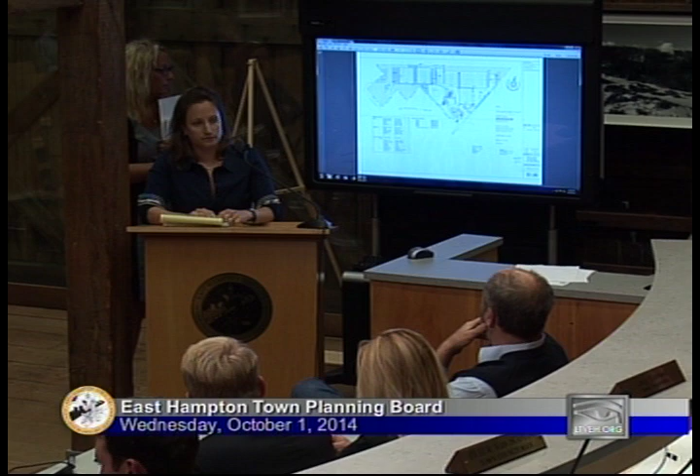Right, so that was my question, so I guess we would be asking you to relax it for that one court, because the others are legal, they're pre-existing. Correct. Okay, so I think it's really great to get the camp under the proper approval and go for the special permit.

Is this where the hockey is, or is that the other one? No, that's Buckskill. That's on the other side of the tracks. Oh, same side of the tracks, okay.

Thank you, Britton. We'll call you back up if we have some additional questions. This is Bob Schaefer's application. He's not here, so Pat Schudy has been kind enough to take the lead on it.

Thank you, Reed. Well, that was enlightening and answered quite a few of my questions. I might not agree with where you're headed with it, but I do understand what you're thinking now. First, I agree that this is a semi-public facility that needs to be submitted. This is a road that has 3 or 4 of these facilities. They've been there since the 60s. It's a nice looking site when you pull in, very attractive and well kept. But there's 8, 9, 10 residential neighbors to this, and some of them aren't happy, and we need to address those concerns.

And I was kind of shocked when I saw tonight that you're looking to put a road in on the western end of the property and a parking area. I'm wondering if maybe that could be mitigated somehow. Instead of eliminating that one court at the end, maybe eliminate one by the parking area and put more in the interior where most of that activity happens now, and reconfigure it that way. I'm just speaking out loud, and I want the rest of the board to weigh in, but I am concerned about this, looking for another road and more parking when you have a lot going on in this site and some contentious neighbors.

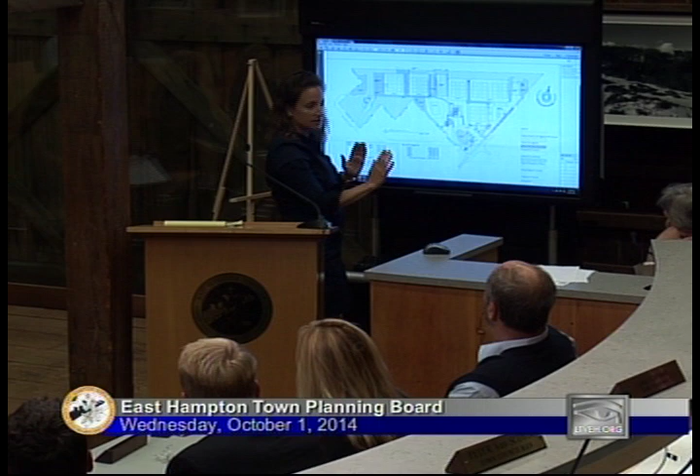We don't want to put any more cars driving in and out than you need to. I think my words got a little twisted - the reason this road went in, it was used for an emergency, it was a footpath, and at one event it was used for emergency egress.

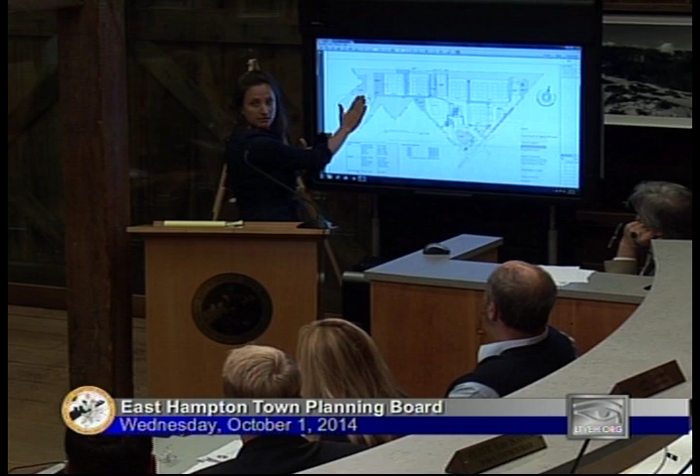At that point, they said, wow, if that ever happens again, we'd really like to have that emergency egress. But then what were the pictures that we saw that was all parking on there? There's a lot of parking going on. I don't know the pictures you're referring to. Oh yeah, there were definitely pictures of cars parking there, multiple cars proposed too, so it's not so out of line to think that it'd be used for parking.

Right, and we're more than happy, I think that was a really wise comment, to say you're taking out this surface right here, and I'll give you a plan and put the parking up here. That's fine. I just don't want to lose sight of the distance from here to here, and the need for a second means of egress, and the logic of having employee parking who come in once in the morning and leave once in the afternoon, and putting that somewhere else.

This is not a, Nancy, I believe you said, summer, August situation. This would not be summer, August, and we would be happy to covenant that this is employee parking only, emergency access. But what about moving that road to the middle so it's away from his house? This was purely arbitrary - this was where the road fell because that's where it was easiest.

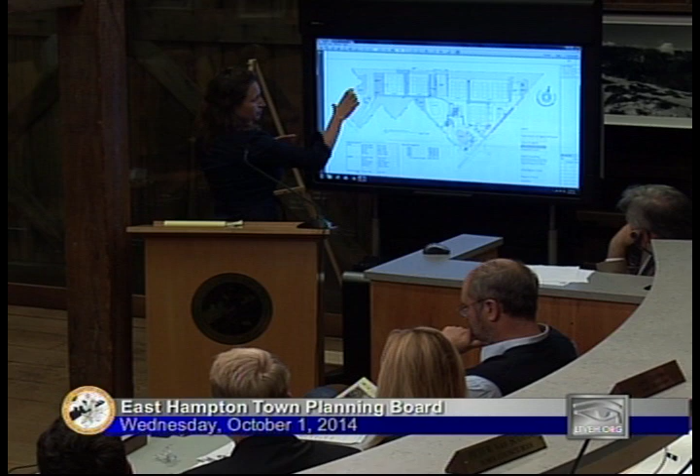Okay, so it wouldn't have been a problem for me to put it right in the middle, re-veg, or put it wherever you want and we'll put a 20-foot buffer on both property lines of greenery. That's kind of what I'm saying, so that people wouldn't park there, you'd have greenery there, and it would be truly a road. We'll move the parking onto this court.

And I'll figure out a configuration with some sort of turnaround, and I'll come back with that. Do you need more parking? Or is this just a byproduct of needing the emergency access? The planning board approval from 1984 mandates that the property has 52 parking spots. They did not mandate that they were constructed.

They could be on lawn area, and the way that lawn area in this loose plan was filed, our code doesn't actually allow for that much parking in the area that they had delineated in 1984. So I'm working with a 1984 number with 2014 code. And what's there now? How many parking places? It's not delineated.

It's probably, I mean, we have this overflow lot that's a grass lawn. They don't use it, it's underutilized. There's never 52 cars parked there. Because I'm just going back to looking at the aerial, to Pat's comment, which is that there is a house, right? If you start developing parking on the west end of the property, there's a house right there.

We can advocate the idea of this parking, we'll move it up to the tracks. No, I don't think that helps though, because if you look at the aerial, the house is right up by the tracks. But that court's being taken away. It's not going to be any closer to the house than the court already is, I understand.

I'm just kind of agreeing with the thought that maybe there should be no parking at that end of the property at all. Just do an emergency access and develop the parking you need centrally located. I would be happy to sit down with Eric and see if we can find 8 spots in this part of it - eliminate one of those courts. I'd like to, but that's the heart - this is the heart of a tennis club.

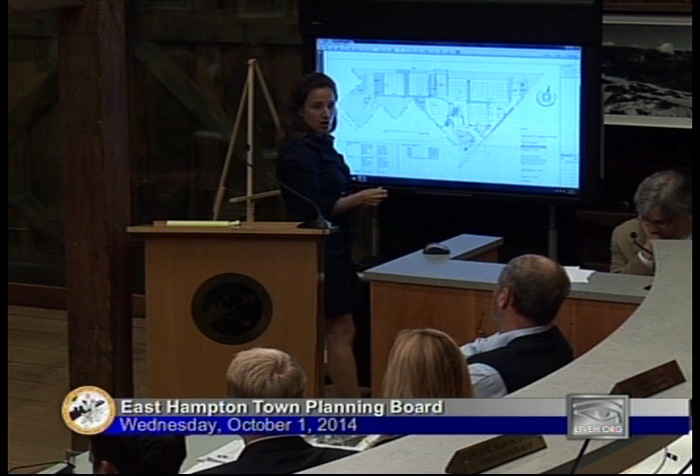Well, you get more exercise to the other side. But you don't have enough parking now, is that the issue on the table? We don't have enough parking for the site plan approval from 1984. Do we have enough parking in reality to function? Yes. Well, then maybe. But I'm not looking to, I don't think I even - what is that?

What's the area? We're locked into that number, and I have to find where to put it. So come back. It's a complicated issue. It sounds like you're building parking you don't want to build, because there's no mechanism to relieve that pressure, though, with a change of circumstances.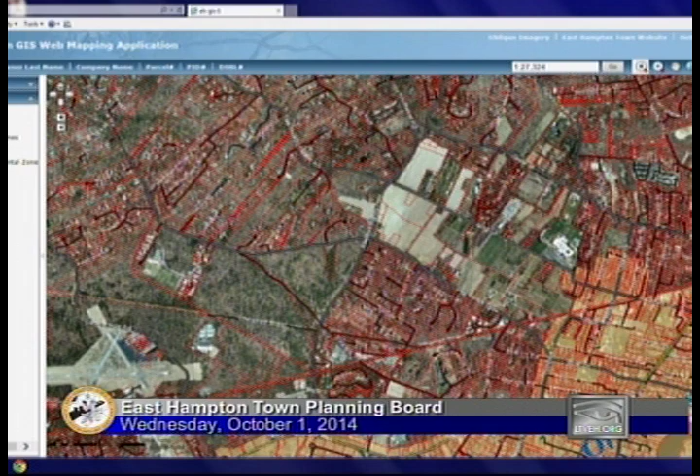Pat, do you have any additional input? No, not at this time. I want to hear from the rest of the board. How are you, Diana Weir? Stephen Hands Path, go under the bridge. Yeah, and there's a commercial site. Yeah, it's the first one on the left. Diana, did you have any?

Okay, I think that whole little street or court is all commercial. That's a little commercial strip. Yeah, there's 4 different businesses there.

So where would they be parking, where people are parking that they shouldn't be? Here, I don't know, the street. There it is, there's the elevation. Right, I mean the aerial, sorry. So we're looking at the one on top, the one to the north. Right, and this is where people are parked, right here.

Sir, this is right here. Every morning at 7 o'clock, the cars are double parked here on Triarch's side. You can't get down there. Now, was that coming in off Stephen Hands Path?

Yes, okay, so that's the industrial complex going in off Stephen Hands Path. Okay, parking, got it all. Our parking is on site. I can understand what you're saying, what your concern was about, you felt there was a lot going on the site. We have parking here for our employees. We have parking, how do we make this small?

Sorry, every time you touch it, it'll zoom in like that. Okay, just make it smaller.

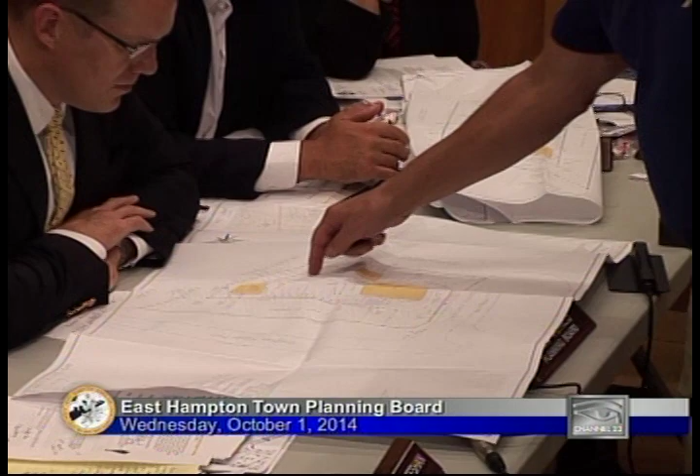If you take a look at that, if you call up that aerial again, what you'll see is that we have parking here. We have parking here, we have parking here, and we also have parking here.

20 years ago, when there wasn't any construction there, because in that memo it says in 1994 - is it '94? - we used to park here. Then what happens, we got some complaints, so then we started saying, well, we'll just clean up some of our site up here, and we created parking wherever we needed. We're the only ones, myself and Pat Trunz, that right now do not use Learned Hand Court for parking and loading and unloading. Every morning there are cars parked along here, and sometimes there are cars double parked on Triarch.

We have 4 sites on here. We have 2 landscapers, myself, and the steel guy. The steel guy brings in some of his stuff every once in a while to work on it here.

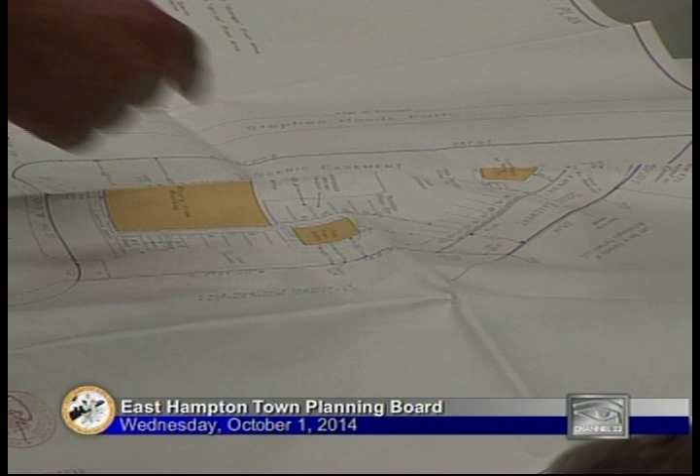This building, the purpose of this building is, number one, we believe we are one of the few, or one of the only, pool companies in East Hampton right now that have containment. We put the chlorine in here. Chlorine and acid together will make chlorine gas. We do not store the chlorine and the acid together, and I do not want to store them together because I could kill my neighbors. I don't know anybody else that separates the chlorine and the acid and has containment. So what I want to do is put chlorine here, acid here, and chlorine here, because that will make it safe. It's the only thing that's going to make it safe.

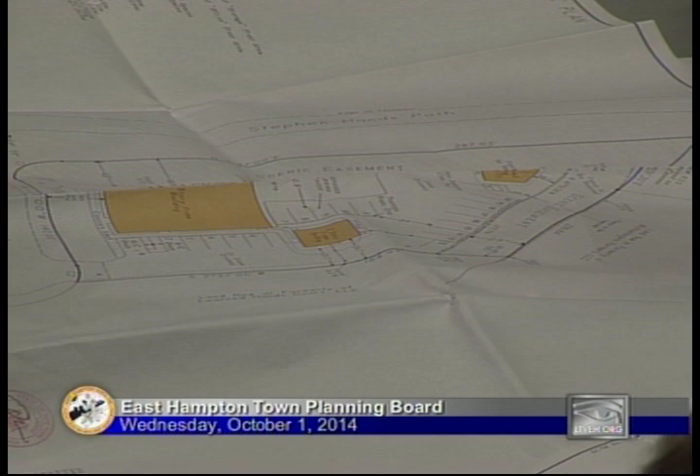At the same time, we have had, unfortunately - and you can look at the police records - we've had a couple of issues. So therefore, what I do is take the fertilizer here, the acid here, all the stuff that's outside storage here, which I think is not terribly sightly, and put it inside this building. Why do I want a building that size? Because then I can clean up the whole thing - the equipment, the acid, the fertilizer - and put it in this building.

Take a look at this. You can see that one car in front of my parking, that one car is right there. We've got extra parking here, but we do not need it. If any morning you want to come take a look at Triarch, their parking is all over the road. We do not park all over the road.

There was another issue raised in this memorandum about the fact that they stated this was a wood floor. I understand why they felt that way, but the way the floor is constructed is we made the containment, then put 2x8s on edge, 12 inches on center, all the way along the building. On top of that, I laid 2x8 planks so it could take up any kind of dolly or weight coming in. But this is not a wood floor. It's a wood floor on top and a concrete containment underneath. The plans in the file, I believe, do show that, for both the new building and the existing. The intention is to do the same thing, contain whatever has to be contained.

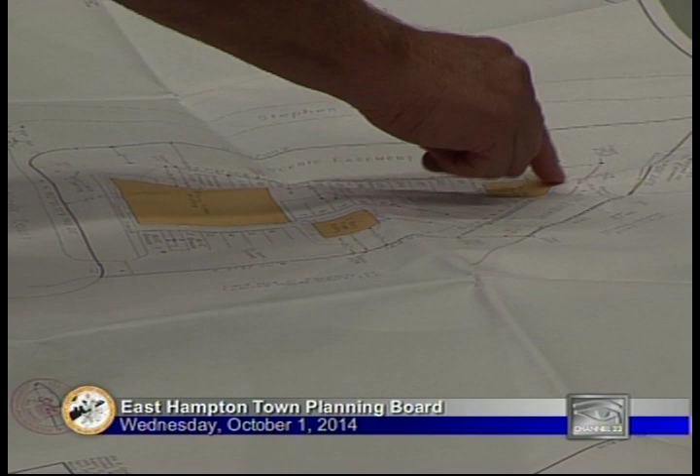I think what this plan does is allow us to put chlorine here, acid here, take the outside storage here, instead of just having it scattered on the ground. Now we can have racks in here, we can stack it up, everything can be inside.

Why 2 stories? What about the second floor? Because you can put pipe and stuff like that on the second floor. Right in this building right now I've got filters and pumps on the second floor, and I don't really have enough space for all my pipe, that's why I pipe back here. On the first floor we have heaters, stuff like that, and other things that we store.

But don't you have an office on the second floor of the existing storage building? I don't know what that was ever designed to be. I do know that from the very beginning we had a toilet and a sink there. Is that approved with the health department? We have a CO on it. This building has not been changed since the original CO, so we didn't put a bathroom in here, that bathroom is there from the initial construction.

The only thing that was under Christopher Farrell's concern is you can't put these doors in front of the bay doors. We could put parking here, and actually I think one of the reasons I would only object to parking here is that I landscaped this, so it looks really nice.

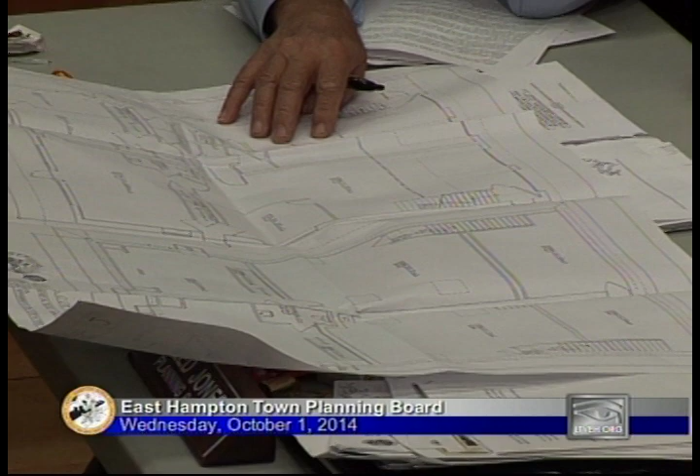So it's principally kind of headquarters space for these businesses? Yes. And then do they have other sites where they have their trucks and so forth? I don't know the answer to that question, we have to find out from them. But otherwise, the parking that we're showing would provide parking for their employees.

Anything additional? No, okay. How about you, Nancy Keeshan? Just to wrap it up, you did a great job of answering a lot of questions that I had and going over everything, so that was great.

As far as the businesses and what they're using and what they're not using, I'd like to see a narrative. I'd like to see it spelled out so that there's no confusion, so we know who's using what and where for the future. And if there is anything going to be left outside, a notation on the map of specifically where that's going to be and what coverage there will be, if there's any outdoor storage, what's going to be there on the map, just again to clarify it.

And my only, let's see, you answered the question about the architect. You need to change the title on the map. Is it the title on storage building to commercial storage building?

I guess you said the second floor of the new building was not going to be an office, you're going to store pipes there, so that will need to be spelled out as well, or put in as a condition. And my only hangup was to sit down with Tom Talmadge and go over the parking issues, because clearly you can do this, but when he's happy, then I'm happy. Yeah, I think that's an important item.

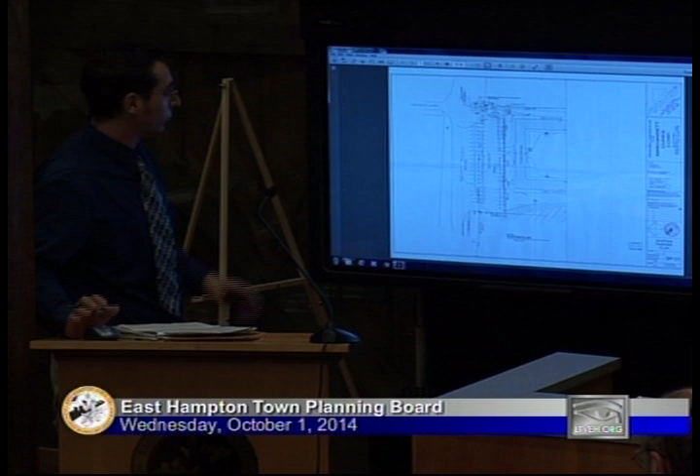There's the existing conditions. Right now, the parking is partially on their property and partially in the town right-of-way, and cars back out onto Bluff Road. It's a dangerous situation. It's a little tough to see, it's not well-defined, but this line here is actually the property divide, so these spaces over here are actually in the right-of-way and not on the property.

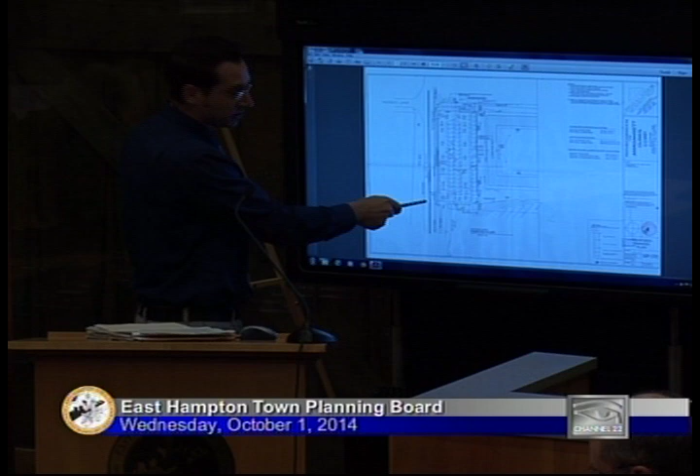I will now highlight what their proposal is, which in general, we support. It's a good project. They're basically adding a landscaped buffer here to have an exit and an entrance, to prohibit cars from backing out onto the road and to control traffic there.

Question, Eric, is that going to be on the town property then? It will be partially on the town property. So if they want to buffer that out, they're going to need approvals for that other space. We need some kind of easement language or something. I'll get to that. But as I see it right now, the spaces are not designed properly.

They don't meet the correct dimensions, which will actually be referenced in the town engineer comments. So I think the applicants should sit down with myself and Tom Talmadge, and maybe we could work something out to redraw this to code. If we are going to do something now that's a permanent improvement, there should probably be an easement granted by the town board to use that portion of the town right-of-way. Additionally, the superintendent of highways is going to have to sign off on this.

I'll jump to the town engineer's comments, because actually his first comment is about the dimensions of the parking spaces. I found it peculiar because he's the one who pointed out to me that the spaces didn't meet the town code requirements. He says they're a little bit smaller than the code allows, but that the planning board may decide to relax the code and accept it smaller, and to my knowledge, you can't do that. So I'm a little confused on his first comment, to be honest with you.

His second comment is that he just wants to see some drainage calculations. He says the general concept is satisfactory, with the exception of the comments from the fire marshal and fire department, which I'll get to — those relate to removing 4 spaces from the plan. He says the handicap space appears satisfactory, and he finds the engineering element satisfactory. But again, I'd like to discuss with him whether the dimensions of the spaces are correct, because he pointed out to me that they weren't, and I don't know if something's changed that I don't know about.

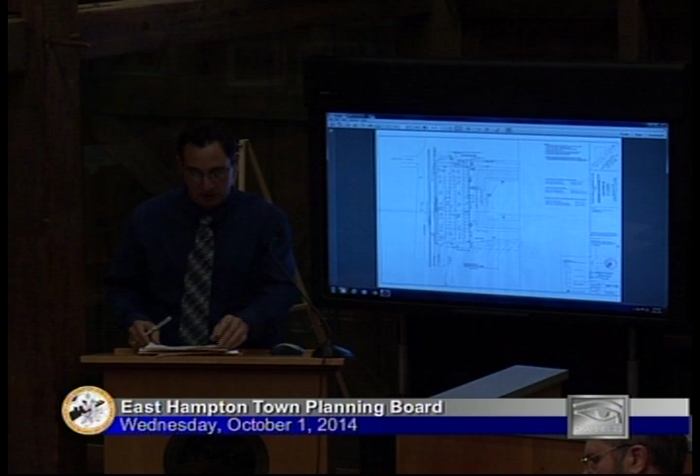Lighting throughout the site does not comply with the code. Rather than a comprehensive lighting plan, I think if the applicants could submit manufacturer's cut sheets for replacement fixtures, that might be acceptable to the planning board. Landscaping — there's no information on landscaping. They're not really proposing any improvements to the interior of the site, it's all in the parking area, but this area is identified as a vegetated buffer that's going to delineate the parking lot from the street, and they should submit what vegetation they're proposing there.

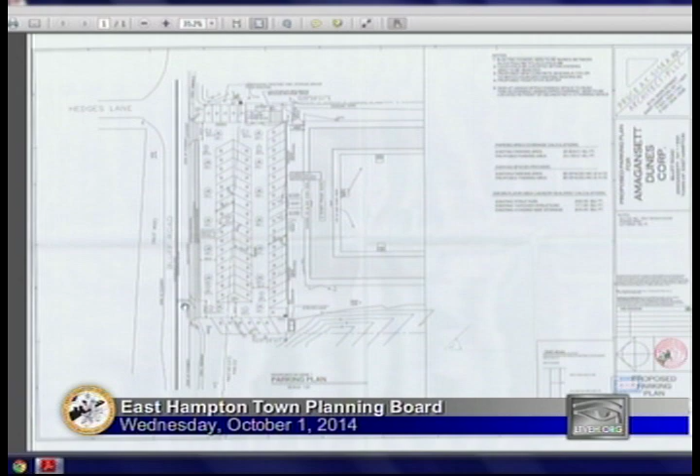The fire department said that 4 spaces should be removed — basically the 4 southernmost spaces here. I think their reasoning is that when you're coming in, these ones here don't have enough room to turn around to get to the front of the building. The applicants will need to redesign the layout to meet that recommendation.

And they need approval from the ARB — that application should be submitted. Right now, this is the only site plan we have, this and the existing conditions. This is helpful and focuses on the main portion of the project, but there needs to be a site plan that includes the entirety of the property, shows all the existing improvements, shows all the proposed improvements, includes coverage calculations and all the elements that we have in a site plan.

So based on those comments, it appears that the application is incomplete, pending the resolution of those issues.

Thank you, Mr. Schantz. I see Mr. Whalen here tonight.

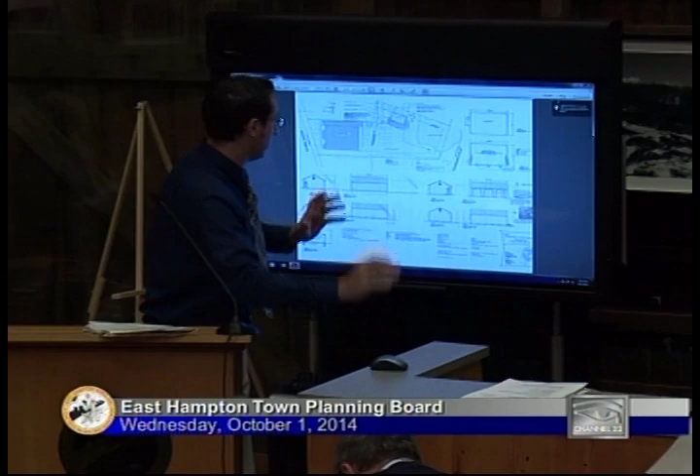Poor guy, okay. So at the time of the last review, the shed on this property was proposed to be moved, relocated, and repositioned on the property. At the time of the last review, it involved an addition to the shed. It's in a residential zoning district, so that would have been an illegal expansion of a non-conforming use.

They've removed that addition. The applicants have submitted a revised site plan that relocates the shed in an area that conforms to all applicable dimensional regulations. They've submitted a lighting plan, which we find acceptable. You should determine if you agree.

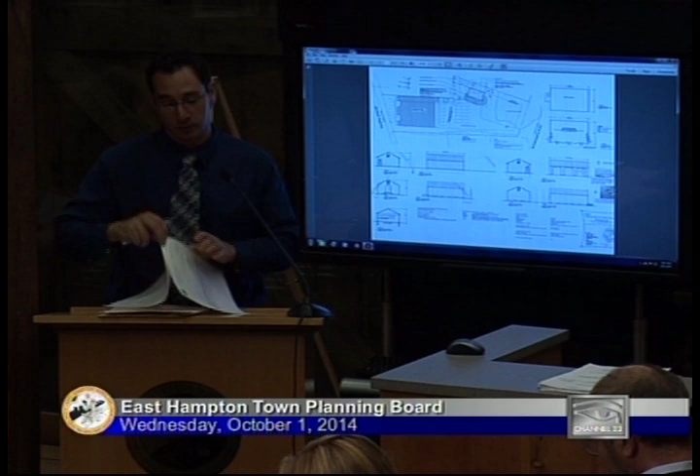They're proposing to add 3 six-foot-tall white pines to the corner of the relocated shed to buffer the neighboring residential property. You should determine if that is acceptable. The town engineer has stated he finds the engineering element satisfactory, so provided you agree, it appears the application is complete and ready for a public hearing.

Thank you, Mr. Schantz. Did you have any initial comments, or do you want us to discuss it as a board and call you up if we have questions? Okay, wonderful. Then I'll go right to Diana Weir.

Thank you for doing the screening, for moving it to where it should be, and I don't see any other problems with this. The drainage issues and what Tom said, I agree with, so I think this is pretty much ready. Pat Schutte? I as well, and thank you.

It was a good chance you were going to have some neighborhood opposition there, so I think you've mitigated that with this. You'll never know until the public hearing, but I think you've eliminated a lot of that, so I think we're ready to go to public hearing.

Ian Calder Piedmont? I agree. Thank you for your patience tonight, sorry that you ended up last. You came before us before, we offered some suggestions, you were very willing to work with us, the department, and I think the plan's a good one and it's ready for public hearing.

Okay, Job Potter? Yeah, I agree. And Nancy Keeshan? Sounds good to me. So it's unanimous, I also agree. So the board agrees that the application is complete and ready to be scheduled for a public hearing. Thank you again for your patience.

All right, when is the next... 4 hours for that, right? All right, thank you, you could have been paying someone. You can watch it online if you missed anything for the last 3 hours. All right, so at this time let's get into our regular meeting.

We have just one resolution. That's de Blase, and that's Nancy Keeshan. In the matter of the application of de Blase minor subdivision for an extension of time for 1 year, or until May 2nd, 2016. 2016, 2015, shouldn't that be?